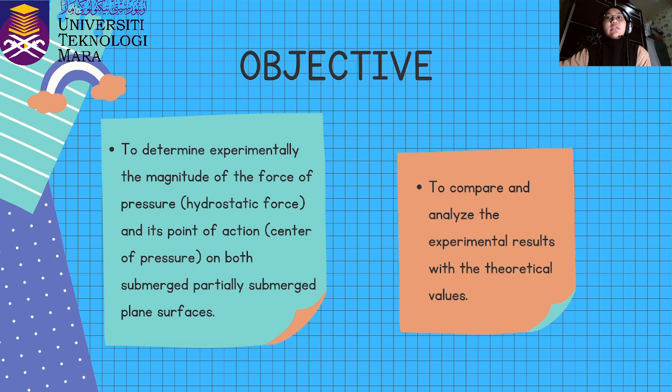Next, I will be explaining the apparatus that we use in this experiment and the apparatus part by part. The apparatus that we use for this experiment is the hydrostatic pressure apparatus. The first one is the counterweight, the second one is the tank, the third one is the drain valve, the fourth one is the adjustable feet.

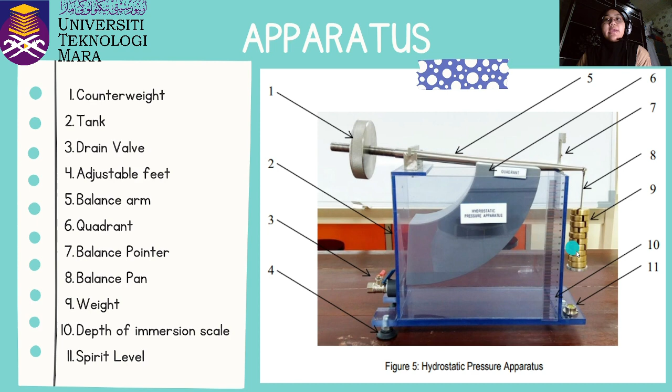The fifth part is the balance arm. The sixth part is the quadrant. The seventh part is the balance pointer. The eighth part is the balance pan. The ninth part is the weight. The 10th part is the depth of immersion scale. The 11th part is the spirit level.

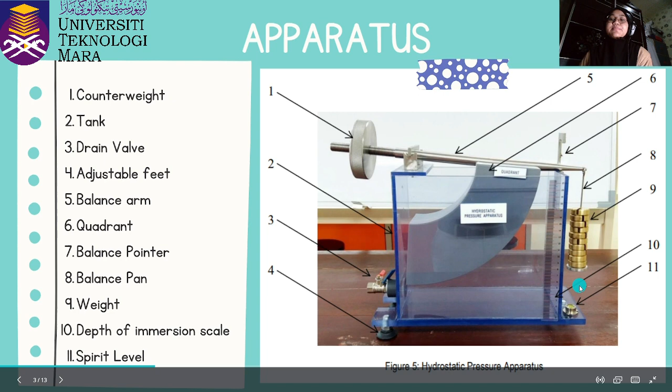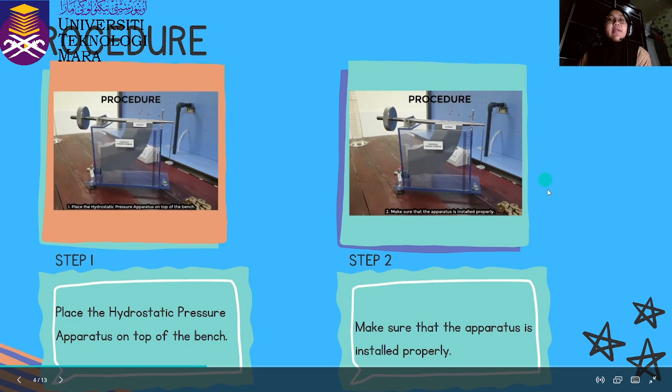Next is the procedure of this experiment. The first step is to place the hydrostatic pressure apparatus on top of the bench. Next, make sure that the apparatus is installed properly. After that, level the apparatus using the adjustable feet facilitated by the spirit level attached. Step number 4, adjust the counterweight to level the balance arm to a horizontal position.

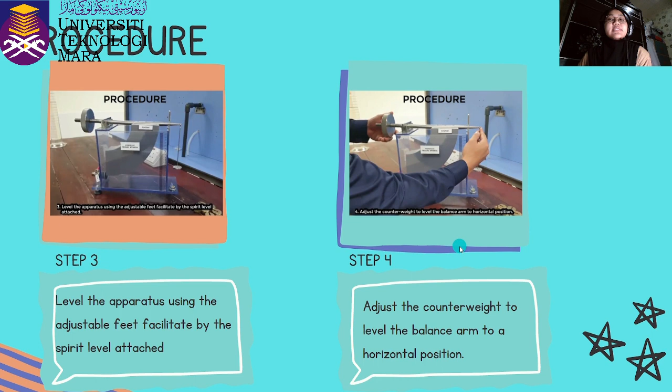Step number 5, make sure the drain valve V16 is closed and slowly add water into the tank until the surface just touches the quadrant base, thus establishing a datum level corresponding to 0 on the level scale. Next, place a 50 gram weight on the balance pan and slowly add water into the tank until the balance arm is again horizontal.

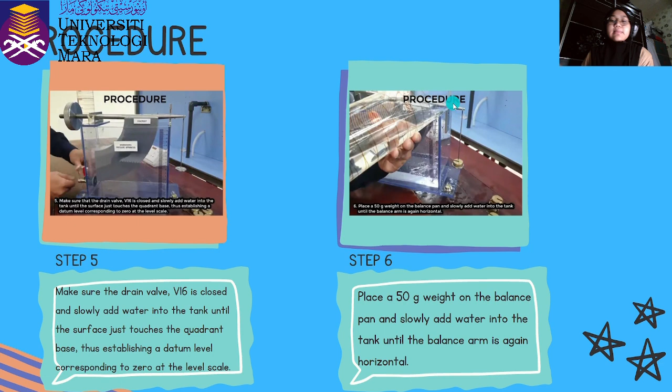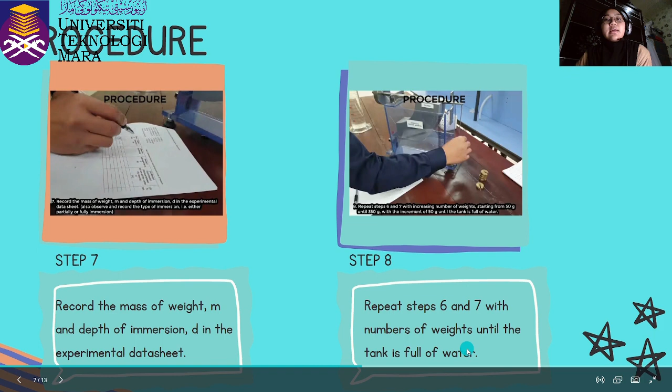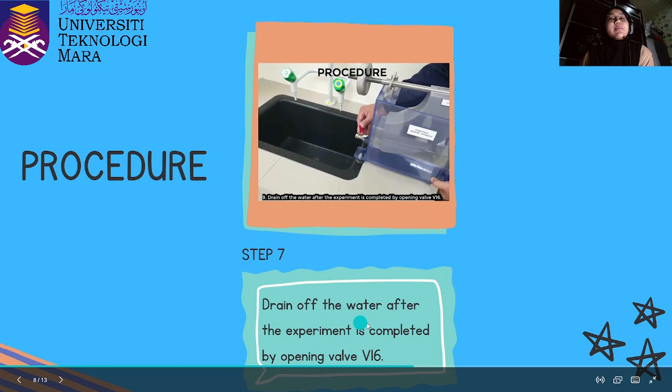Step number 7, record the mass of weight M and depth of immersion D in the experimental datasheet. Next, repeat steps 6 and 7 with a number of weights until the tank is full of water. Then drain off the water after the experiment is complete by opening valve V16.

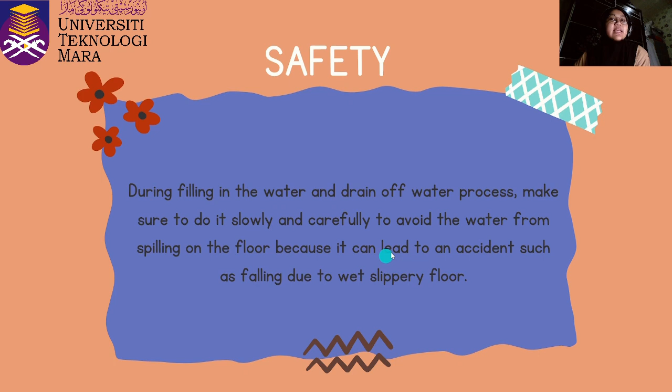The safety precaution that is important in this experiment is that during filling in the water and draining off the water, make sure to do it slowly and carefully to avoid the water spilling on the floor, because it can lead to an accident such as falling due to a wet, slippery floor.

Okay, for this part, I will do the calculation and plot the graph. In this table, I already used set data number 2 that I have taken. So mass, depth of immersion, full or partial, the data for these is already in set data number 2. So we just need to calculate the resultant hydrostatic force, second moment experimental, second moment theory, and error. For the table, I already did it. We just fill in the blanks by doing the calculation and plot the graph.

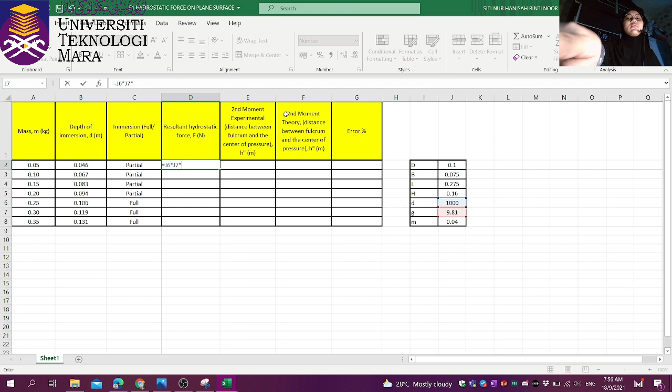From here, for the resultant hydrostatic force, we need to use the formula rho g B d squared over 2. Okay, for the second moment experimental, the formula that we will use here is mgL over F.

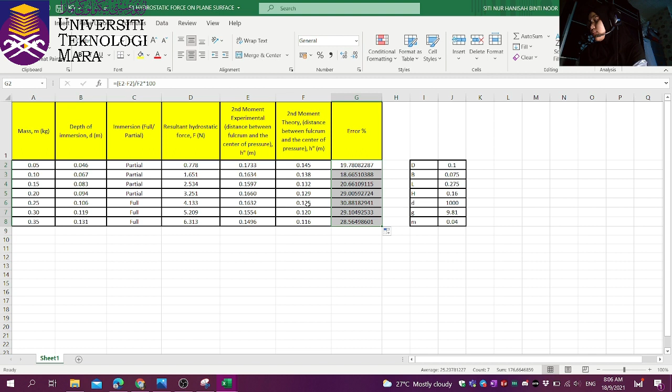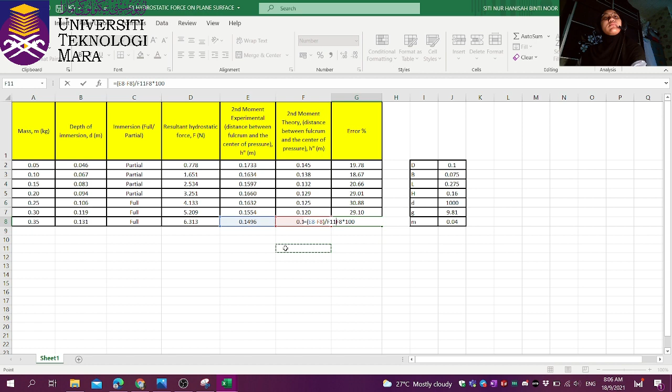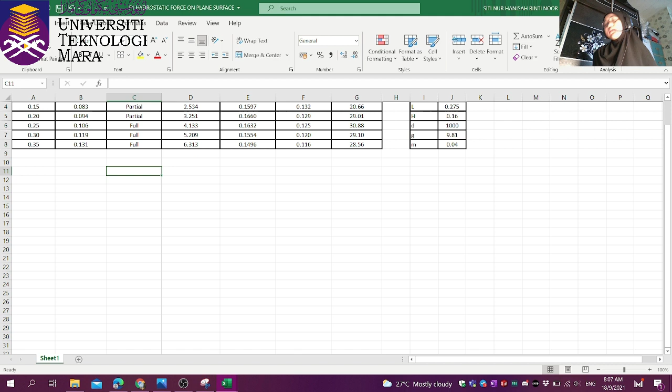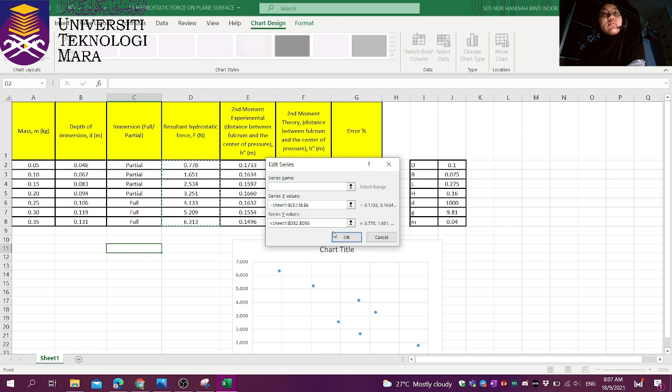So from here, we will do the graph, which is resultant hydrostatic force against the second moment of experimental and second moment of theory. So from here, we select data, insert the x value, and then this one. Okay, data. From here, we change the

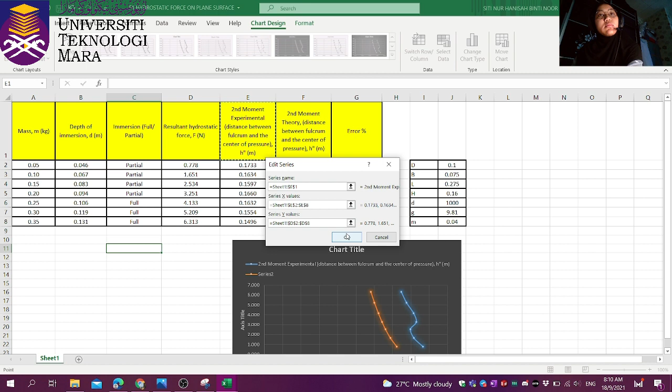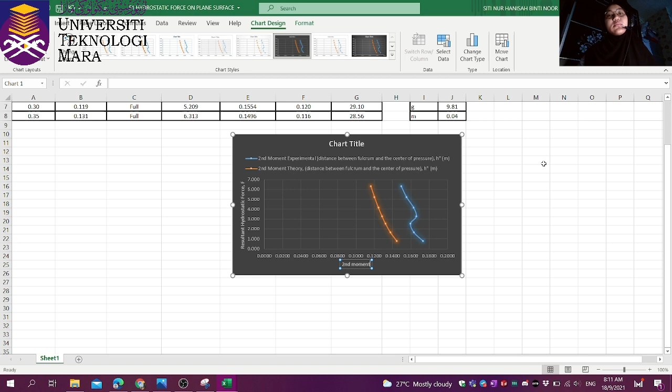This one is the resultant hydrostatic force. And this one is the second moment. And then after that, it is the

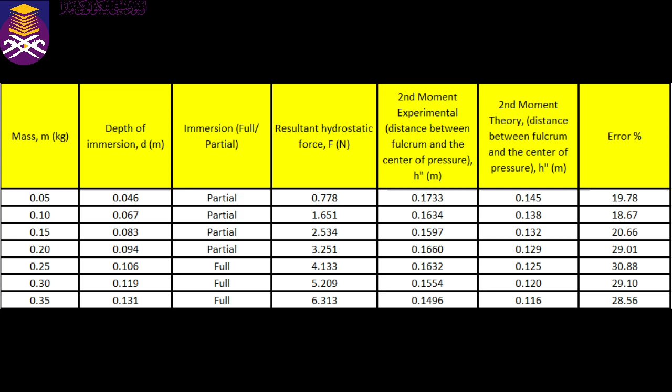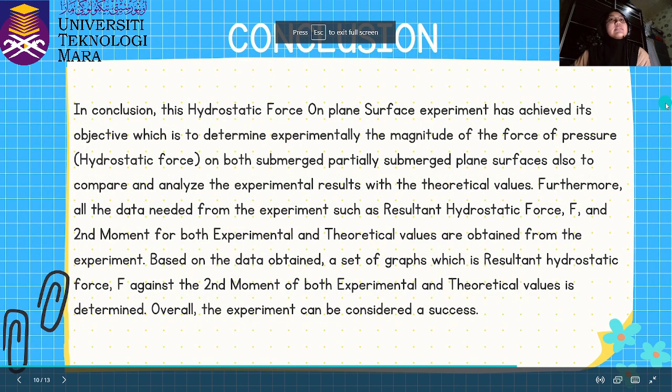The next part of this experiment is the conclusion. In conclusion, this hydrostatic force on plane surface experiment has achieved its objectives, which are to determine experimentally the magnitude of the force of pressure, hydrostatic force, on both submerged and partially submerged plane surfaces, and to compare and analyze the experimental results with the theoretical values.

Furthermore, all the data needed from the experiment, such as resultant hydrostatic force F and second moment for both experimental and theoretical values, are obtained from the experiment. Based on the data obtained, a graph of resultant hydrostatic force F against the second moment of both experimental and theoretical values is determined. Overall, the experiment can be considered a success.

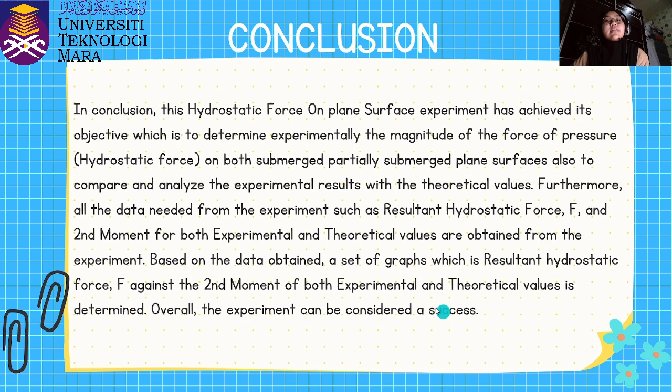The next part of the experiment is the recommendations. There are 3 recommendations that I can recommend for this experiment. The first one is make sure to understand and follow each step of the experiment procedure to avoid any error happening during the experiment.

The second one is make sure that the eyes are parallel with the scale when taking the reading of the experiment result so that parallax error can be avoided. The third one is use the right concept and formula to calculate the data for the experiment to avoid making mistakes during the calculation process.